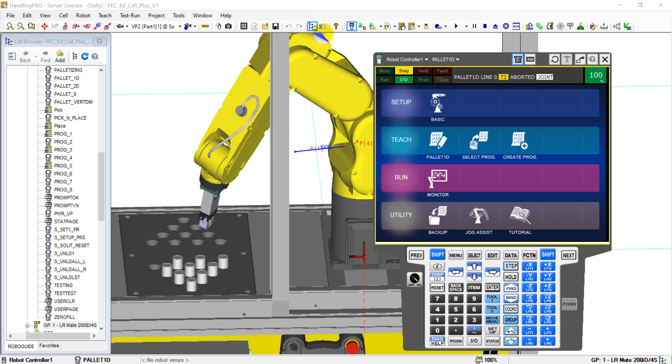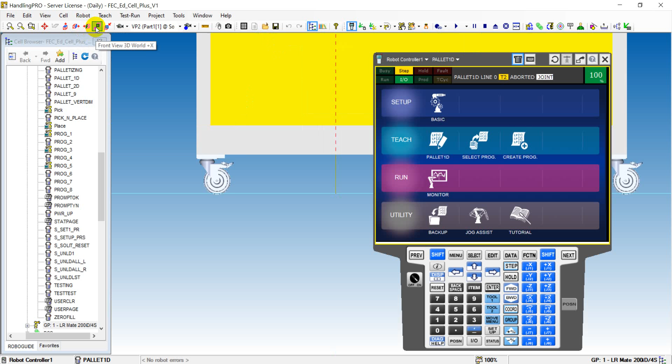So this robot is right here for us. You might want to see around it, so you could use the zoom buttons here, zoom out, zoom in. But that won't show you enough. Fanuc gave us these tools to turn the robot around, but I don't use these buttons because it doesn't make much sense to me.

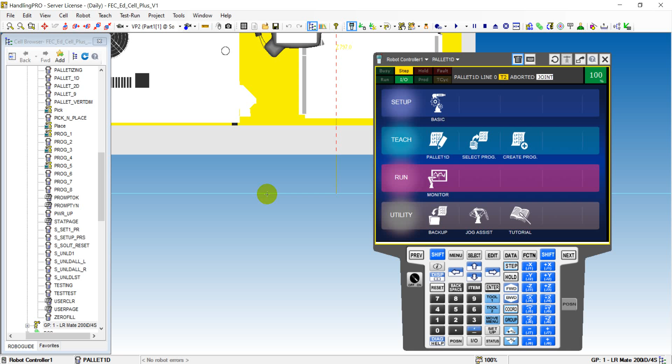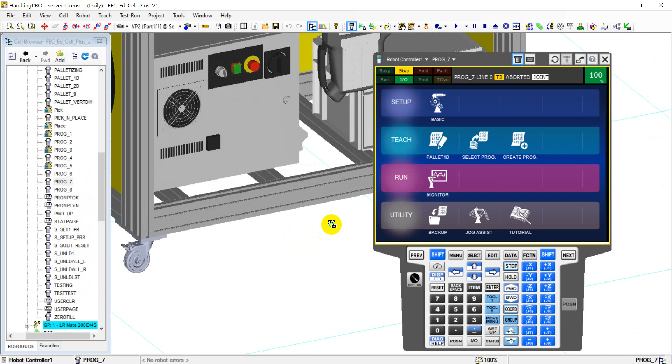So what do I do? I pan my robot, or I rotate or orbit it where I want, by using the shift or control key. Let's say I want to revolve the robot around. I press down and hold my right click button, and I can turn it around the way I want.

But now I've turned it this way and it doesn't make sense what I see. I can zoom it, just zoom out, zoom out, zoom out. It still doesn't make sense. What do I want to do? I want to pan it now. So I press the control key, then click and drag.

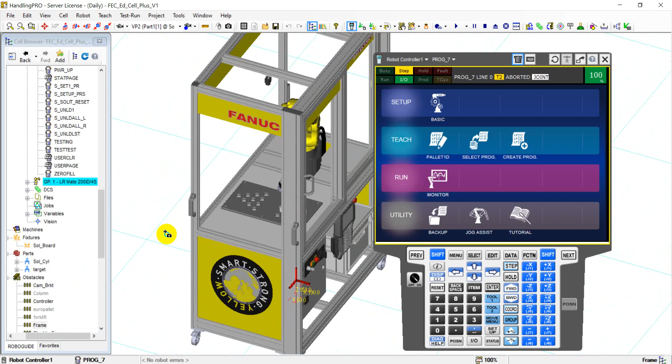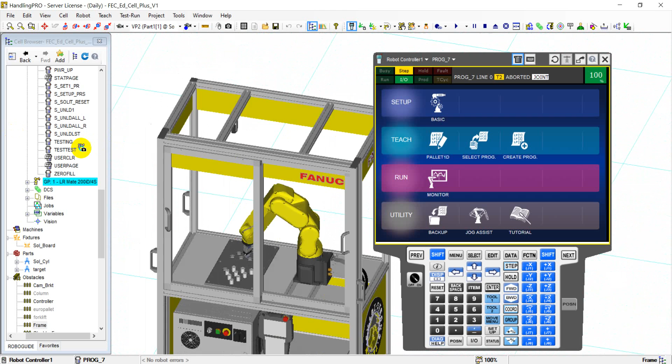Again, press the control key and right click on the screen and drag. That's what I do. Now that I've done this, I can right click again and rotate the screen, and now I can see better views of the robot.

There are other shortcut keys you could use to make your movement through the screen easier. You can see those keys by clicking on this mouse icon here, and the shortcut keys appear. For instance, to rotate, use right click and drag. To pan, use control plus right click, or your middle button and drag. To zoom in and out, you use both.

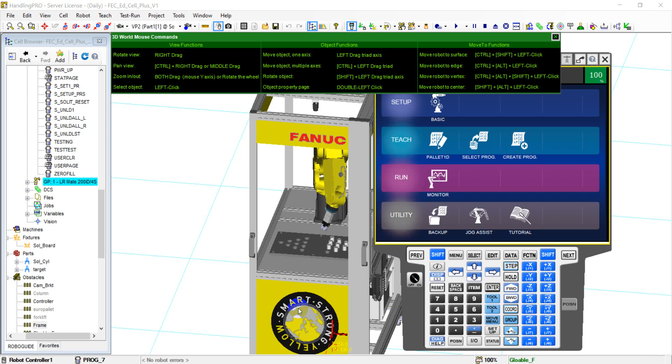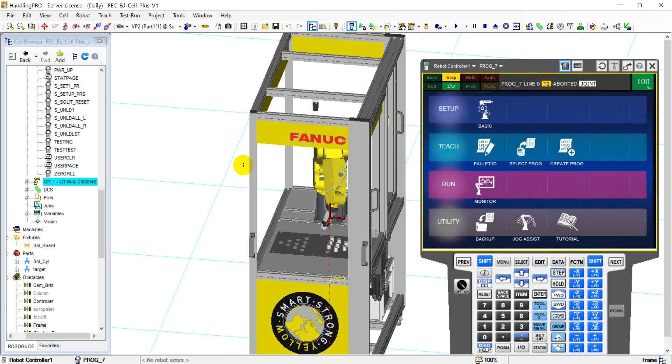For instance, you might want to manually jog your robot without using your teach pendant. How would you do that? First, let's rotate this robot to a view that is more convenient for us. I press right click, turn it around, then pan it again - control down, right click, then move.

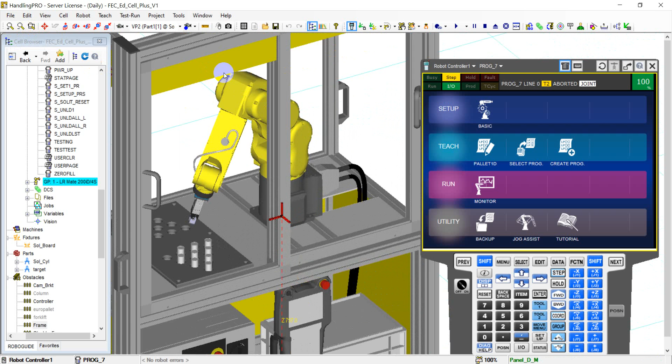Now I can zoom in a bit to make it more visible. Let me pan it a bit again. Now you want to jog this robot manually. Let's say, for instance, you're using Roboguide and your robot crashed into the table. You might get stuck if you don't know what to do. Don't panic, like I always say, don't panic.

Come here to the show or hide joint jog tool. You click on it and you will see the jog handles come out for all the joints on the robot. You just click any of the handles and move it in the direction of the handle. It's pretty simple - click and drag, click and drag, click and drag.

For instance, we might want to reorient the end of arm tool. You can go in this orientation and position it the way you think it should be, but be sure that it's properly positioned. Otherwise, if you put it in the wrong position, you'll get a lot of errors.

You can move this joint also. This will come in handy when you're trying to teach points in Roboguide. Otherwise, you can basically make these movements with your teach pendant. Okay, don't drive it through the table - if you do that, you're crashing your end of arm tool, damaging your table, damaging your robot, or damaging your tool, either way.

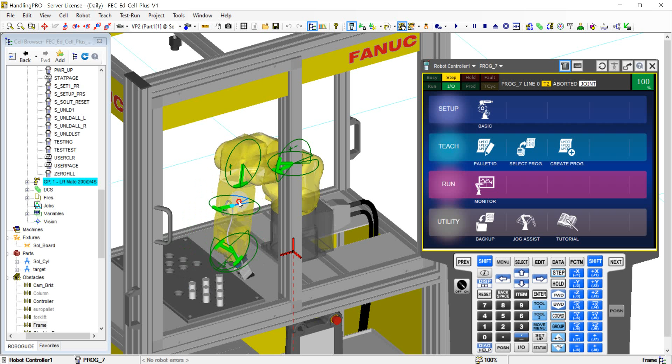But don't panic, don't be scared, that will not happen here. At most, you will get an error on your teach pendant - you cannot damage any of the stuff here. So I'd pretty much let it test the limits on the computer. That's the kind of stuff you'd say don't try this at home, but in this case, don't try this in the lab. Of course, you're fired if you do that.

Okay, now that we've done those, let us proceed to actually move our robot. Let's jog the various joints of the robot manually using the joint jog tools, and also do the same using the teach pendant.

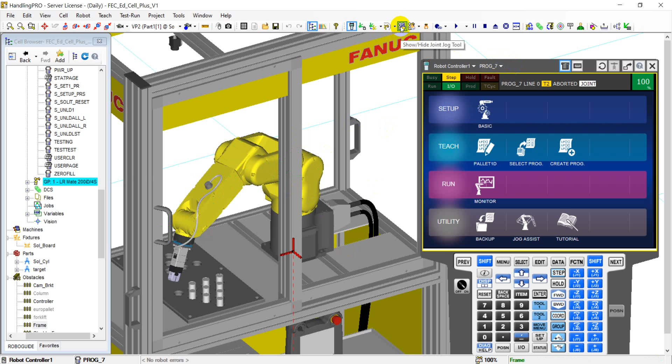Okay, so I'll click on this. After I've clicked on this, remember you can show or hide it. Now I'm showing all the joint handles, so I jog it this way, I jog it this way. I can jog this out, I can jog it in, I can jog it in the rotational axis.

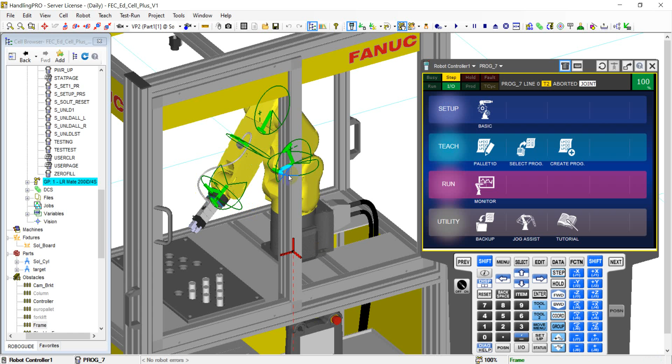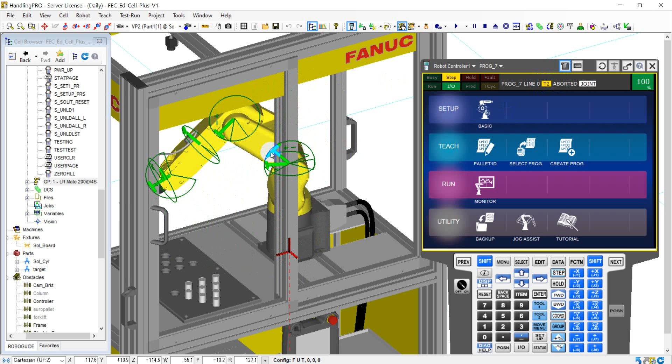Okay, and I can jog joint 1. So let's count the joints. You jog joint 1, this is joint 1, and you're jogging the robot in your x-axis. Then you jog joint 2. So assuming you're using the world frame, joint 1 is your x-axis, joint 2 is your y-axis, and joint 3 is your z-axis.

But these are the major axes. Now let's go to the minor axes. I call them primary and secondary axis. People give different nomenclature, but basically just know the joints, joint 1, 2, 3 to 6, and you're fine.

Okay, so these are the primary, and then let's go to the minor axes. This is again joint number 4, which is your x-axis on the minor, x minor. Make sure it's properly oriented before you run your robot, otherwise you could have your robot going in the opposite directions by the time you input your programs. Okay, and then the y minor, and then the z minor.

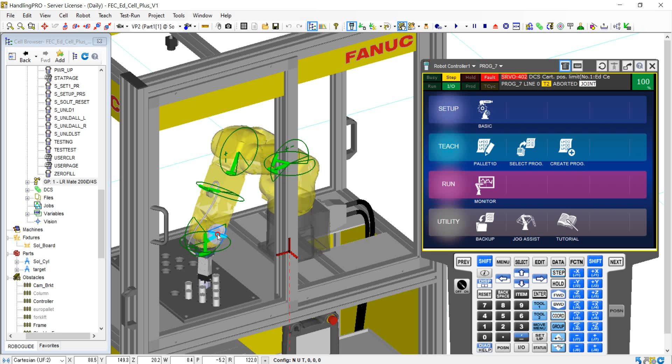Okay, all right, that being done, we're fine now, I believe. Now we can try to do the same with our teach pendant.

Oh, you see we already got the error popped out on the teach pendant. We have a fault. It's because our tool is conflicting with the table, the datum on the table. So we need to jog this robot clear of the table and then reset the error. Good, the error is reset.

Now, in order to jog the robot using the teach pendant, you have to engage your shift key. Either you're clicking on it here on the screen and leaving it permanently, shift, and then you can click to undo it later, or you can press the shift button on your keypad, and you can jog it in the X.

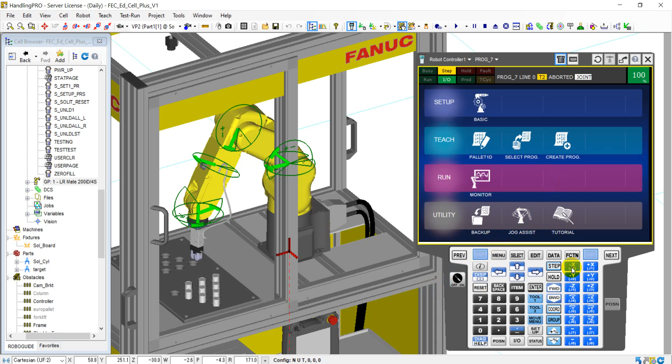You see the speed is too much, so we need to reduce our override. In Roboguide, to reduce your override, you just come down here like you do it with the real teach pendant and reduce your override. Let's reduce it to 10%. 10% is a fine number.

10%. Okay, so now shift down, X plus, take it back. See, notice that I take my mouse off it and it's still moving because it's pressed down. It's assumed that when you press it like that, you're pressing and holding. So you have to tap it again to unhold it, to take your finger off it in that sense.

Okay, then let's do this for the Y. Okay, the Y minus, and then the Y plus.

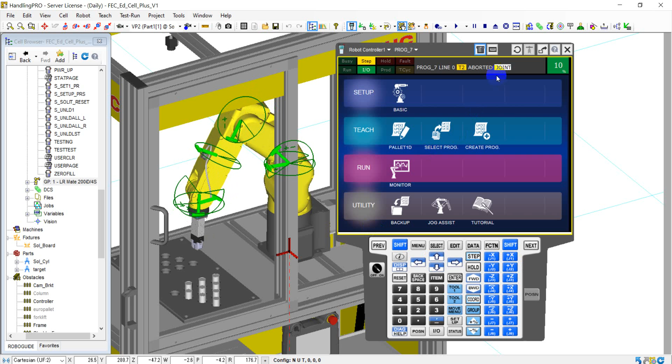But something very important, before you start jogging your robot, you need to put your robot in world frame, because that's where your axis, as it is on this jog grouping buttons, would actually reflect with your activity, so that if you want to move X, you know you're moving X.

And how do you do that? You do that by clicking on your coordinate key on your teach pendant. You click on your coordinate key, it changes the frame. Can you see the frame is changing? Okay, so you're changing the frame. We'll talk about frames in some subsequent video, including your user frame and the importance.

You click it to world, good. Set it in world view, in world frame rather. So used to saying world view because I use a lot of CAD software. Okay, bear with me please. Set it to world frame, and now you set it to world frame.

Let's jog our robot again. Okay, and jog it in the Z, the Z down. Oh, don't crash it. Then the Z positive is upward. Okay, our minor axis, you jog your minus.

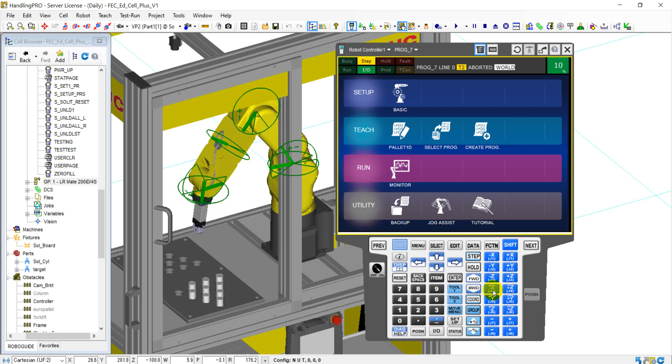X with your J4 joint. You jog your J4 joint. See the, okay, let me move it to the side a bit. Jog it back.

Okay, you jog your J5. You can jog your J5. Okay, you can jog it back. That's a joint 5. Okay.

Now you can jog your end of arm tool. Oh, you can, let's just up the override a bit. Up the override to 15, up it to 20. Okay, then that's cool. We can let go of that.

And now, so with these, you can basically jog your robot around, move it to where you want to move it to, and then teach your points if you want to teach points. Okay, teach your points.

But note that the robot has limits. There are limits you move the robot to, and it will throw an error, it will throw a fault on the screen. I'm sorry about the call.

So in the coming videos, we'll talk about how you can teach points in your work cell, teach points with your robot, and how you can create a user frame, and how you can create a tool center point, and the importance of these things. You would also hear about them in the coming videos.